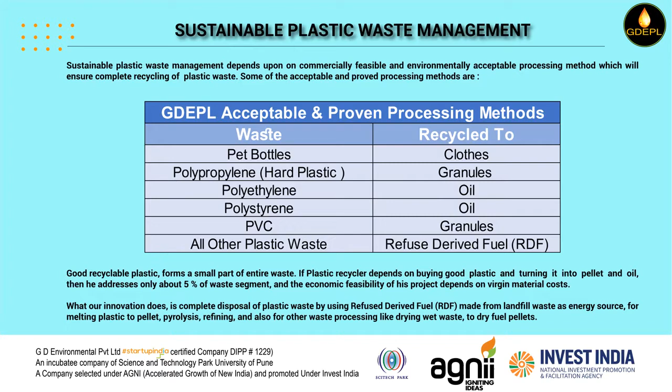What our innovation does is complete disposal of plastic waste by using refuse derived fuel (RDF) made from landfill waste as energy source for melting plastic to pellet, pyrolysis, refining, and also for other waste processing like drying wet waste to dry fuel pellets.

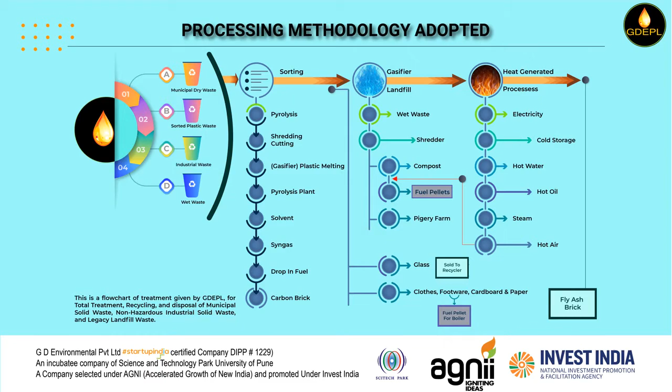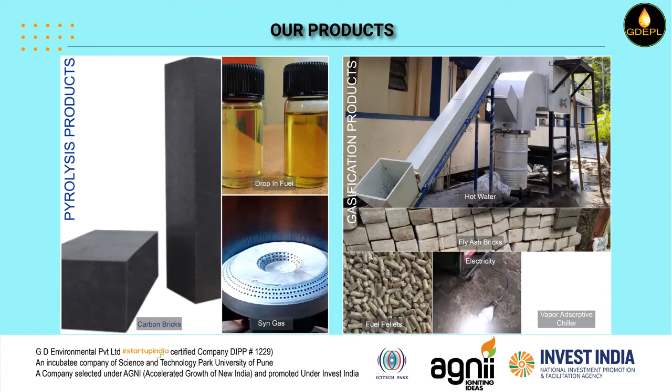This is a flowchart of treatment given by GDEPL for total treatment, recycling, and disposal of municipal solid waste, non-hazardous industrial solid waste, and legacy landfill waste. Pyrolysis products. Carbon bricks, drop-in fuel, syngas are gasification products. Hot water, fly ash bricks, fuel pellets, electricity, vapor adsorptive chiller. Gasification for plastic melting, and patented liquid for dissolving thermocol.

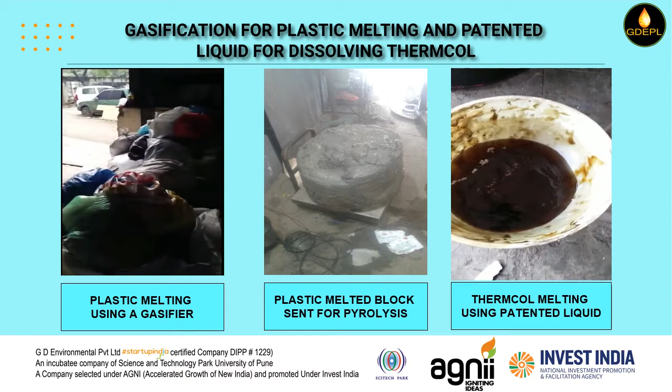Are pyrolysis end products.

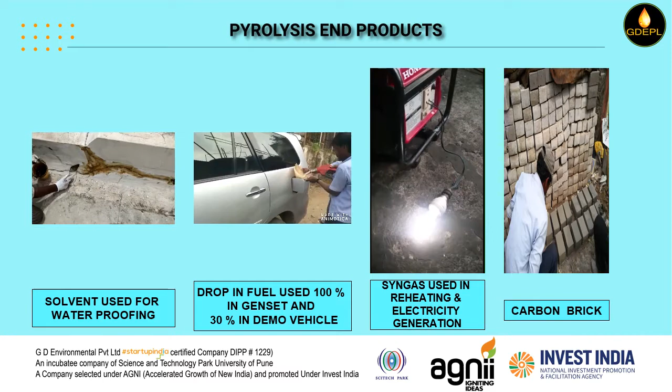There is a difference in incineration and gasification. Gasification uses partial oxygen, or one-third to one-fifth of normal content, in ambient air. Incineration uses excess air. Hence, there are less chances of dioxin furan formation in gasification, as the end syngas products are totally different from incineration flue gases.

Gasification leads to formation of hydrogen, which helps in achieving the high temperature of combustion under partial oxygen conditions. The table above depicts the basic elements and end products formed by incineration and gasification.

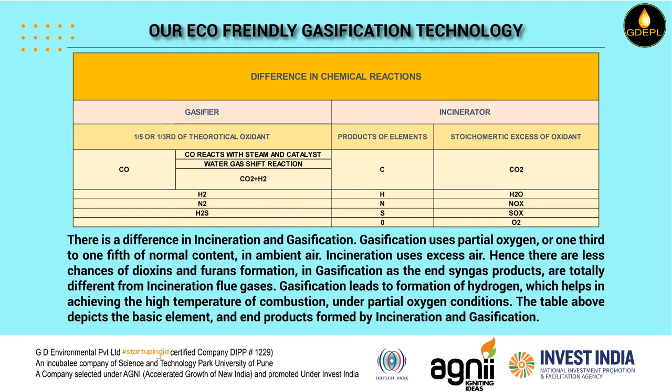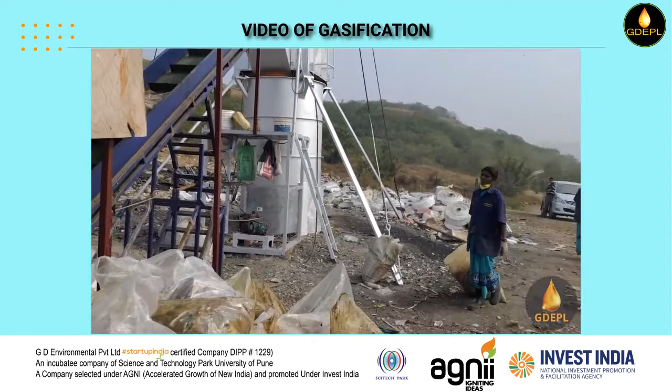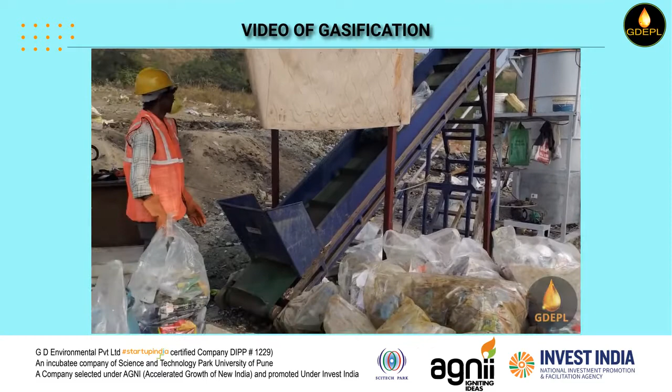Waste processing site at Pirangut Sorting Station and Landfill. GDEPL has set up a 250 kg per hour gasification unit which processes the Pirangut Gram Panchayat landfill waste absolutely free of cost. The Gram Panchayat is free to sell the recyclables.

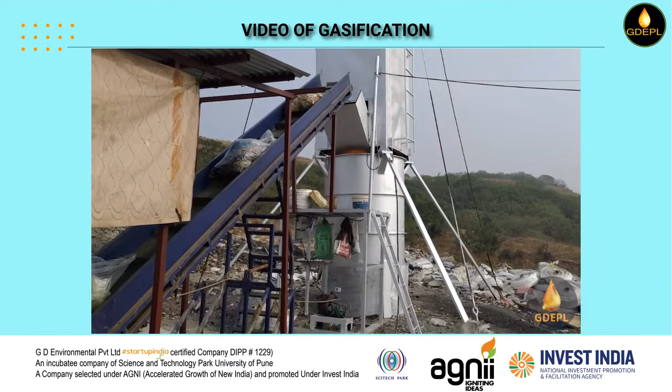GDEPL gasifies all the other balance material going to landfill like cotton, footwear, bags, multi-layered plastic, and any other item that cannot be sold.

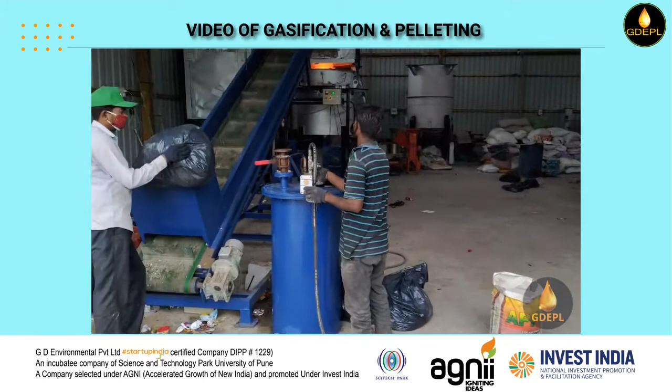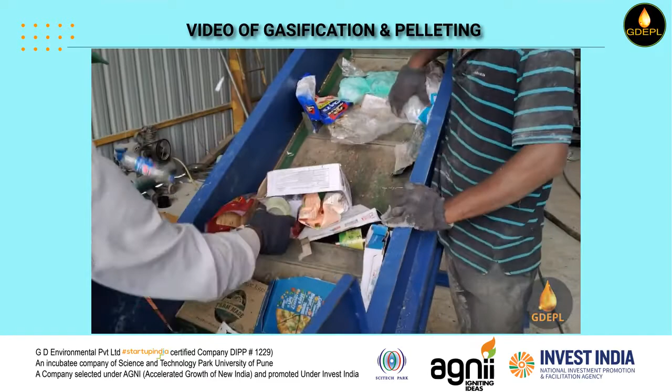Blue Ridge Waste Processing and Material Recovery Facility. GDEPL, along with technical collaboration from Gangotri Energy Projects Private Limited, has set up a wet and dry waste processing center in Blue Ridge Township at Hinjawadi, Pune.

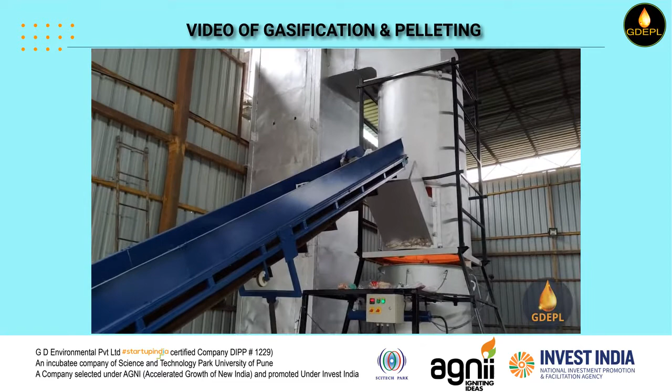GDEPL, being the primary processor, does the segregation of the entire dry and wet waste. The recyclables are sent to waste recyclers. Plastic and thermocol are then transferred to the GDEPL waste plastic to oil unit for processing into oil. The wet waste is then shredded and dried with help of gasifier energy to produce fuel pellets.

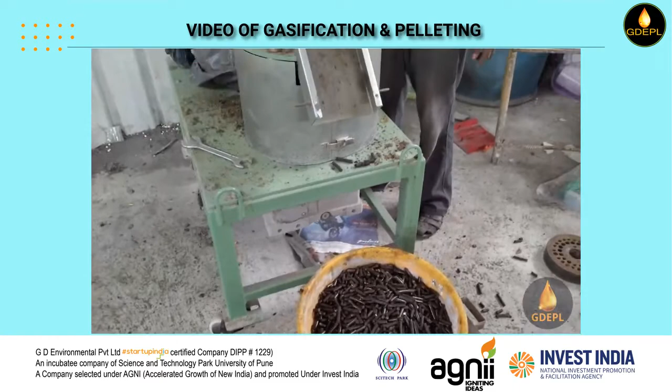Gangotri Energy Projects undertakes the technical guidance for making these pellets and selling them to boilers. It is most likely the first project in India which has zero landfill waste and is economically feasible and environmentally sustainable.

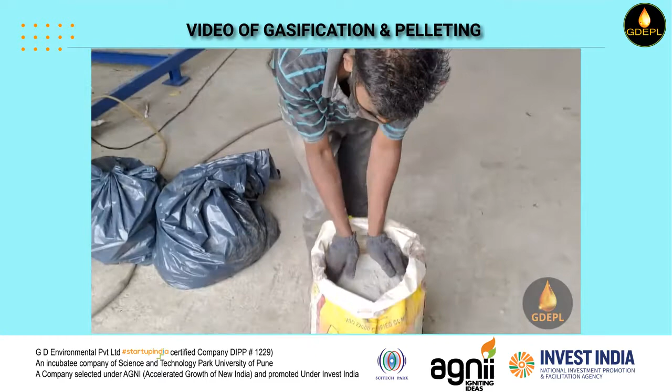This residue ash from gasification is converted into bricks or paving blocks.

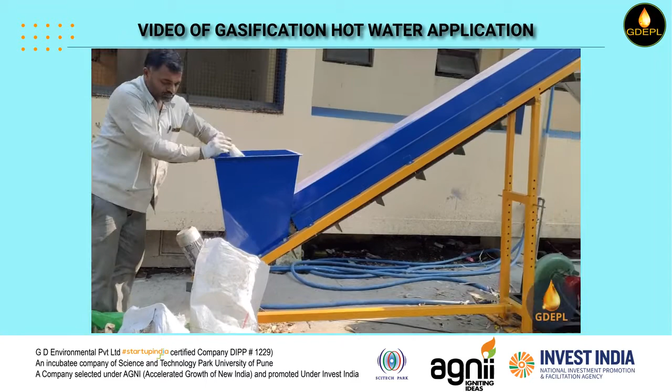Nidhi Prayas Gasification Unit and Hot Water System. This gasifier unit was developed under Nidhi Prayas scheme funding by the Department of Science and Technology. The plant was installed at Girls Residential Blind School near Gandhi Bhavan, Kothrud, Pune. All the waste from the school, including sanitary waste, is disposed in it.

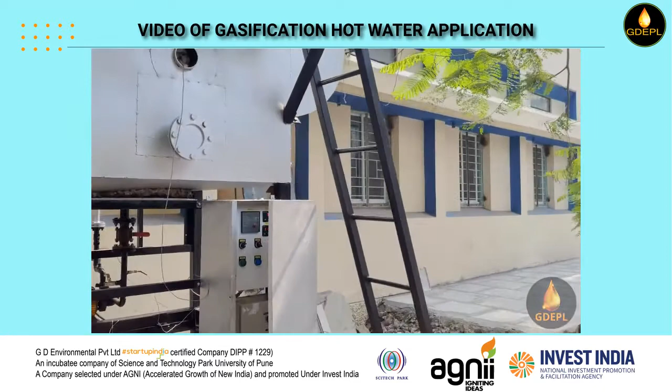The energy generated out of the gasification of waste is then used to heat water. This water is stored in solar tanks and used in showers. The electricity thus saved is substantial, as around 35 kilograms of waste heats 500 liters of water to about 75 degrees Celsius in under 45 minutes, and it is ready for use.

This boiling water, when mixed with 500 liters of normal room temperature water, suffices for all the needs of the hostel. The electricity charges incurred for the process were 400 watts per day, or rupees 2.75 for heating 500 liters of water per cycle.

Specialty of GDEPL system. The first stage gasifier itself generates a temperature of 1000 degrees centigrade and is multijet with 7 internal stages. It has been continuously used for municipal landfill waste disposal for the last 2 years and has been visited and seen by many dignitaries. We have specifically designed a 2-stage gasifier which caters to all compliance and requirements of biomedical waste disposal.

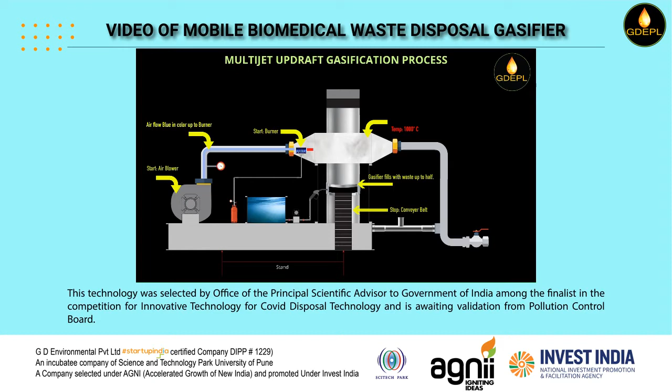The excess hot air is used for our waste to energy system, which comprises wet waste drying, electricity generation or cooling applications. Even though our sulfur dioxide levels are extremely low, not needing a chimney, we provide a 4-meter chimney from ground level for residual heat dispersion.

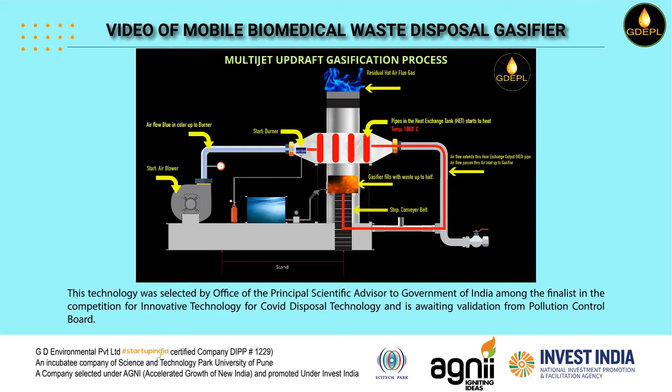Our combustion efficiency, which is a very important parameter in gasification, even in single-stage gasification, has been clocking 99.5 to 99.9%. There is no visible smoke or odor. We have tested our single-stage gasifier for dioxins and furans from Vimta Labs, and they have certified that all parameters are within limits.

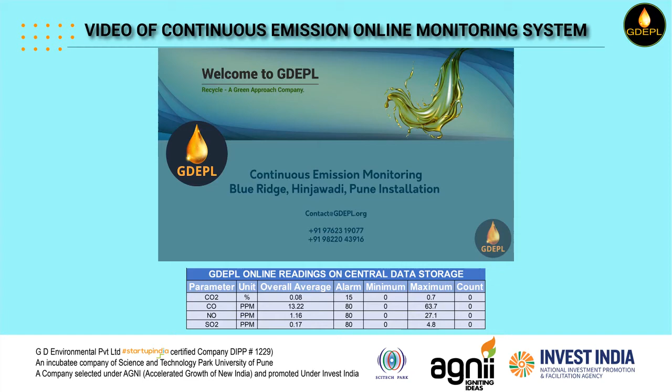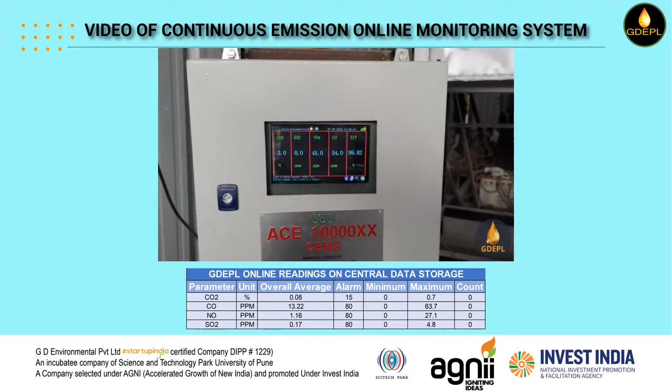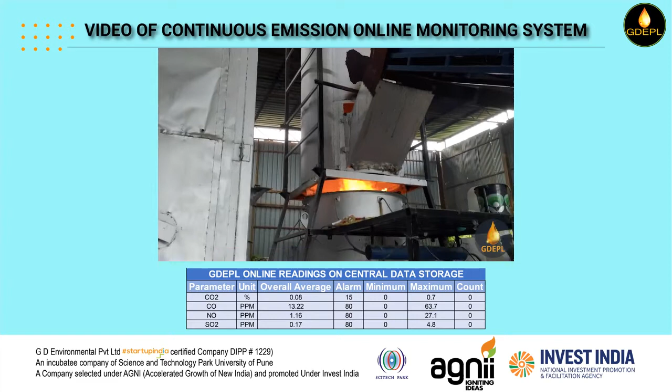Continuous emission monitoring for Blue Ridge Gasification Unit, Hinjawadi, Pune. GDEPL has installed an online continuous emission monitoring system in line with CPCB guidelines. It can be connected to our central data storage by GPRS. It measures sulfur oxide, nitrogen oxide, carbon monoxide, carbon dioxide, oxygen, and combustion efficiency.

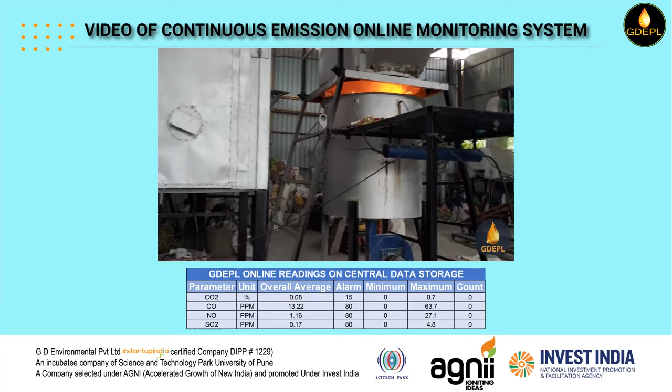Manpower requirements to run the plant. The plant is semi-automatic and two people operate it. Depending on value-added product generated out of excess heat, we may need additional manpower. Maintenance required for the technology. The internal ceramic needs maintenance once a month. The heat-absorbing elements in the second chamber may need maintenance. Other components like electric motor and pollution sensors may have to be replaced should they malfunction.

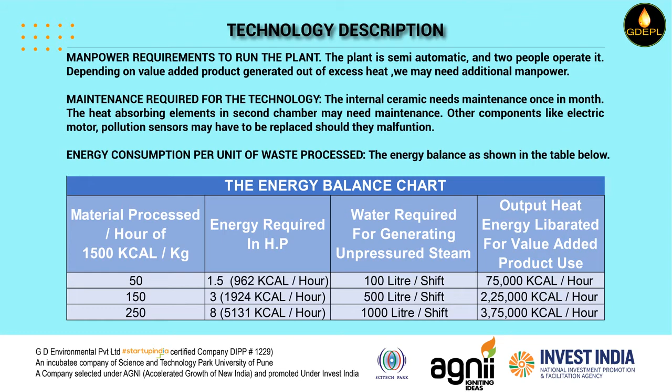Energy consumption per unit of waste processed. The energy balance is as shown in the table below. Space requirement is minimum, and ash generated is only 3 to 5%. We generate a lot of local unskilled jobs. Our products are used by local farmers in the form of compost. Fuel pellets are used for boilers in industry and by agricultural value-added product manufacturers. We also generate electricity if required in isolated areas.

Capacity building. We have modular decentralized waste processing units of 5 ton per day capacity. Meet minimum government standards. We comply with Municipal Solid Waste (MSW) Rules 2016 for municipal solid waste processing. We are MPCB authorized recyclers for plastic waste in Maharashtra. Our drop-in fuel from plastic is comparable to high-speed diesel.